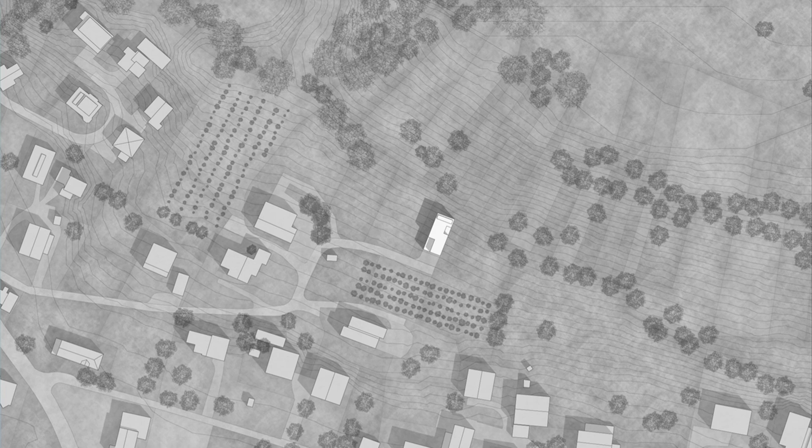Very beautiful thing. We had already done a few buildings in Zurich with rammed earth, and he is an expert in it, and he wanted to set an example with a building built with an old tradition, originally a very economic and very sustainable tradition, to build a new house with modern expression, let's say. The other goal was to use as much excavation material from the site as possible to build the house. In the end, we managed to build the house with 80% excavation material from the site.

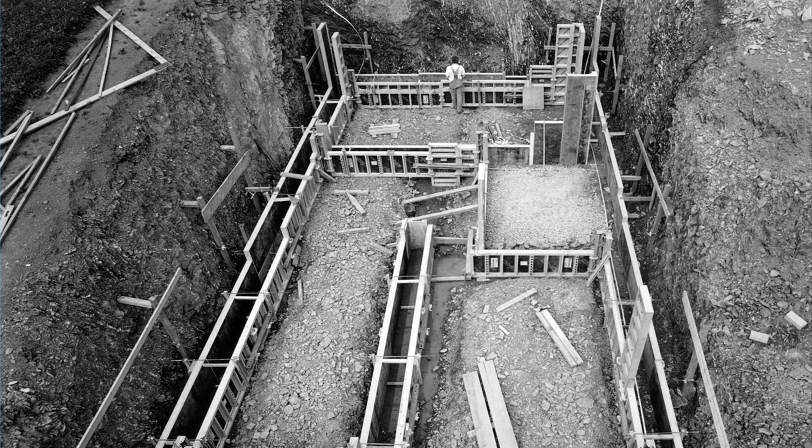Of course, not everything can be done with this material: glass, wooden interior things, doors, and some insulation we couldn't do with it, but we wanted to show the world what can be done with a very sustainable technique nowadays. Everything was built on site. Here you see a slide of the excavation pit with all the formwork. It needs to be very strong. It's similar to concrete formwork.

I don't go into details here at this point. Why am I telling you all this? Because especially in this small house we did there, it's a really smart way to take a shortcut in the circle of how the industry at the moment is working, because excavation material is usually considered as waste. So you dig out the hole, take the waste, bring it away, throw it away, basically, and then you bring new material to the site to build up the house.

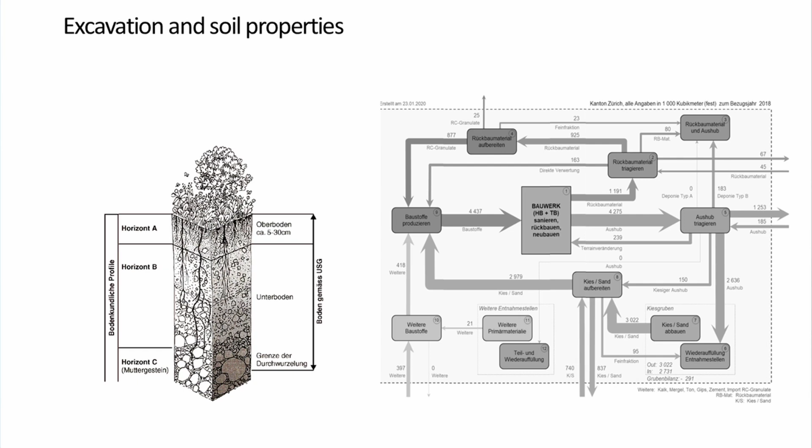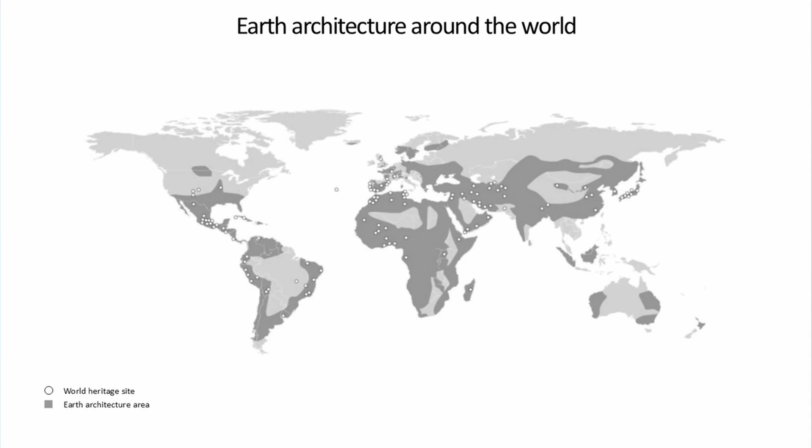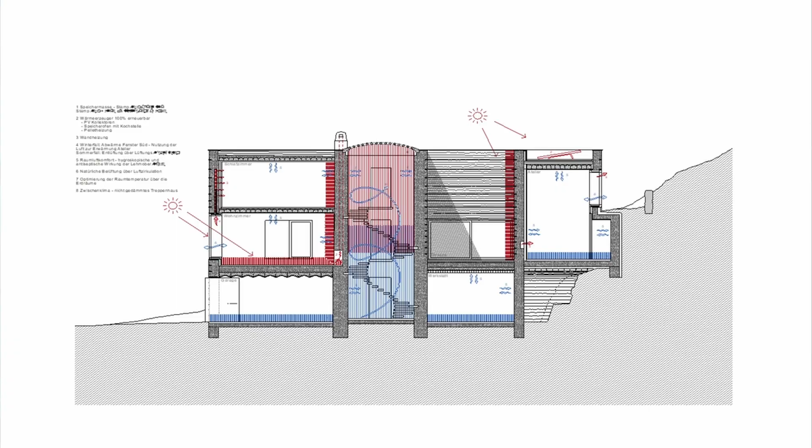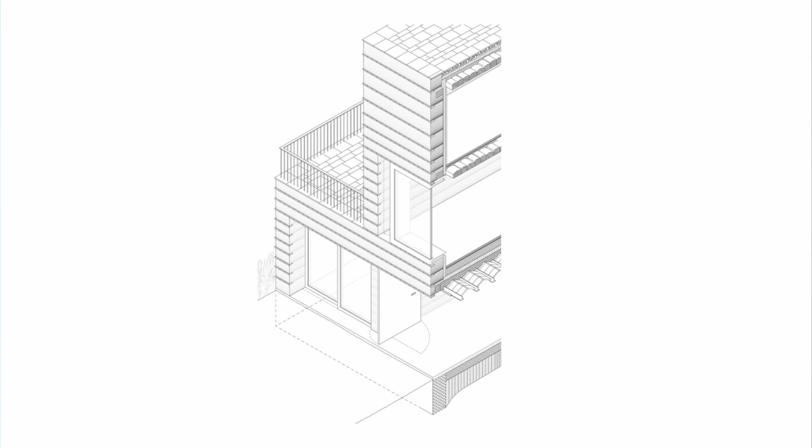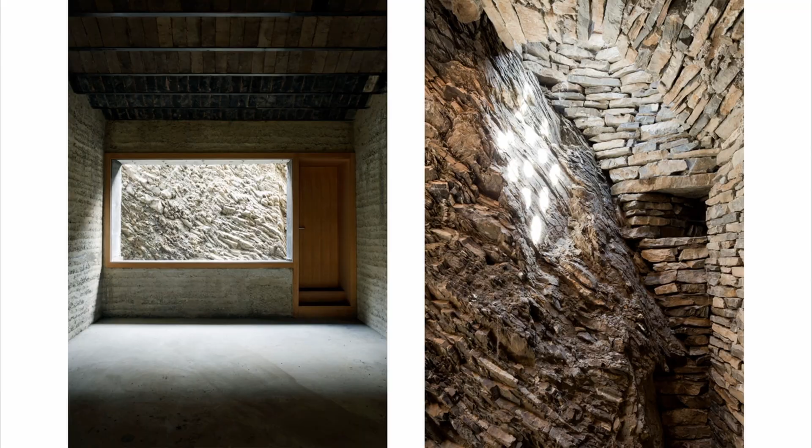Everything is insulated with, what's that called? Reed, also a biological material, except the staircase. There we were keen to see how the staircase and the climate in the staircase reacts, because these walls had to be much thicker. Then all the surfaces in the interior are done by this excavation material we found on site. The floors, the walls, everything. And here another example of it.

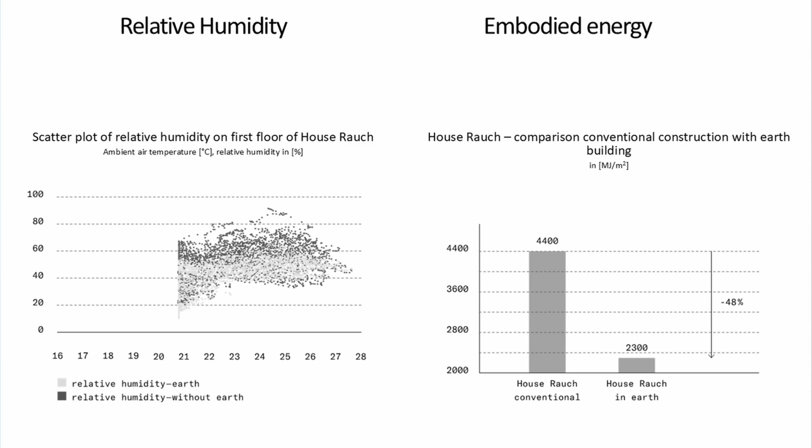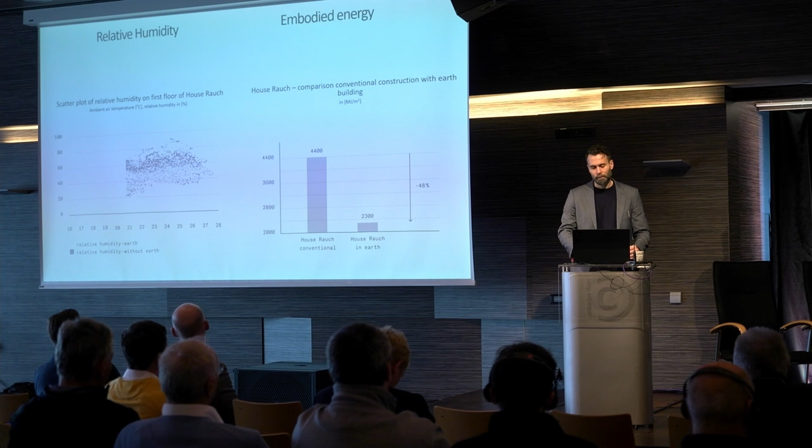They're pretty stable in between 40 and 60%, which people in houses feel as comfortable, whereas a conventionally built house has a much more diverse spread. And on the right diagram, you see the diagram of the embodied energy. These are always calculations, but now we're pretty certain of how the feeling is in this house, because it's so old already. But we calculated that you have a difference of almost 50% in embodied energy to a normal built house.

From there on, I would like to take you to some things we do at the university, especially Boltshauser. He has been to different universities, mainly in Switzerland.

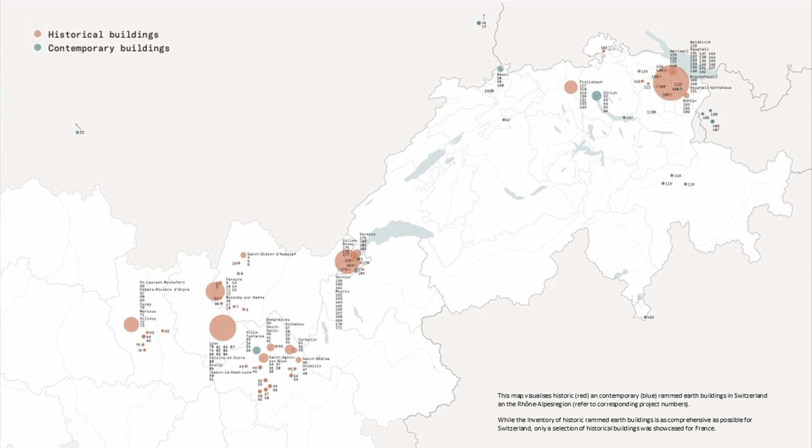For example, in Lausanne, the French part of Switzerland, but also in Zurich, and there we kind of followed the track on the rammed earth examples there are in Europe, because also in Europe it was a traditional way to construct, like before steel concrete got invented, like 160 years ago. It was quite a common tradition, especially in France, in the south and east part of France, around Lyon, but also in Switzerland.

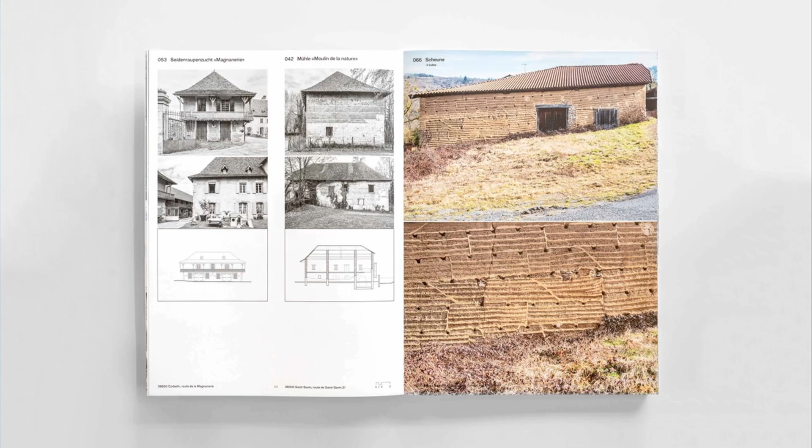We discovered all these buildings, we made a book out of it, we combined it with the modern buildings and showed some details in the book. We even put all the buildings on a map so that people can look at them. We showed, like I said, different examples.

And we also went into Cointeraux, that's an architect out of the 18th century that experimented, or kind of, he did a book at that time about rammed earth building. And it's really interesting to see, I'm just showing you that because the formwork he used was pre-concrete invention, and it's pretty much exactly the same when you look at the plans.

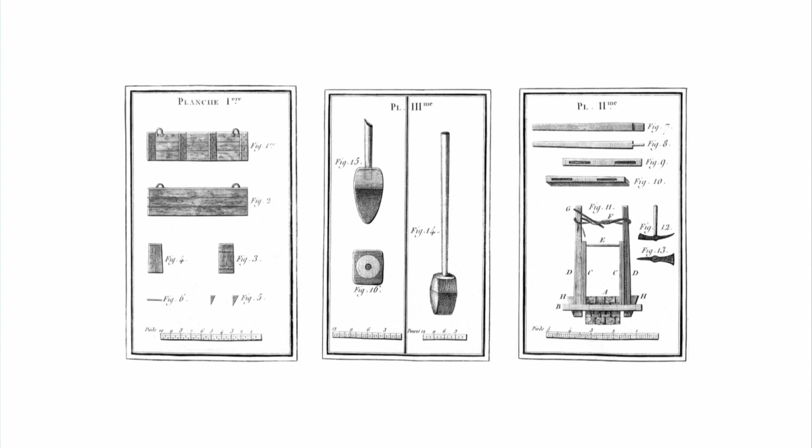With the students together, we did the one-to-one mock-up where we built up rammed earth with this old technique, and you even see you got this climbing formwork here already invented at that time. So in a way it's quite similar, but also it's not.

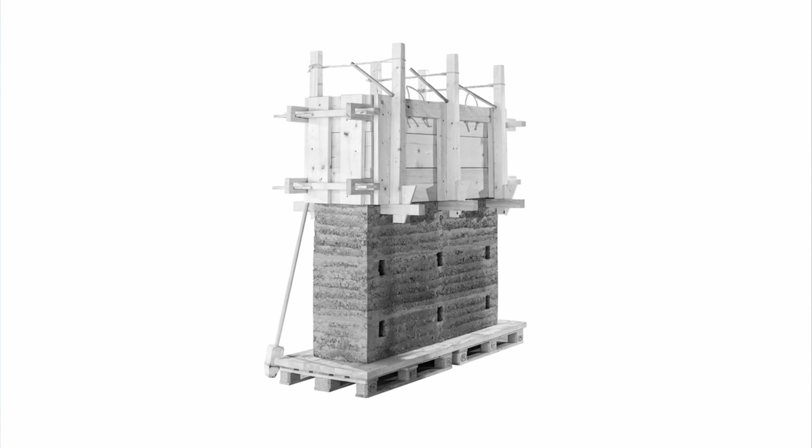So we went following him up, this Cointeraux and all these old buildings, and we, of course, got to the solution that it's not. It might be a good solution for single-family houses, like we did for Martin Rauch, but it's not really possible to integrate it very well in the building industry we have nowadays.

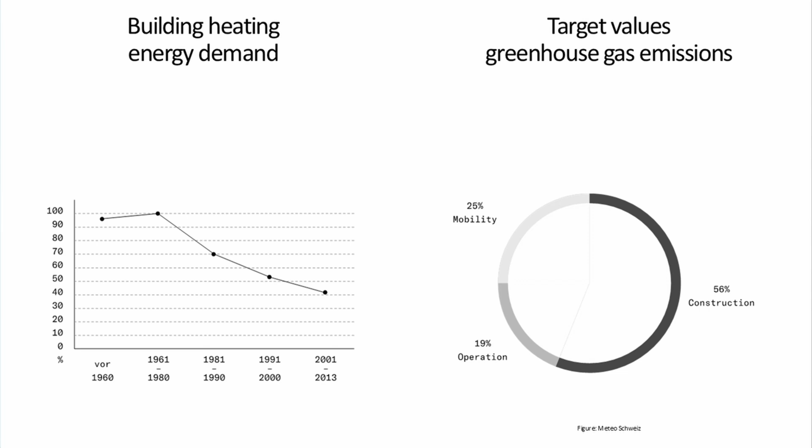Just these diagrams I can skip. On the left side is how the building energy decreased, at least in Switzerland, by new technologies, better insulation, and so on. I think you heard that a lot in different lectures as well. And on the right side, it's the circle of how many greenhouse gas emissions the building industry produces, and just to show you the impact we can make in the future. But this you already know.

So back to the traditional way of building. Then we went to the universities and tried to evolve the learnings we got out of this traditional way of building. And one of the results for us for the future might be, of course, hybrid structures, to combine all these good parts of the rammed earth with other materials and structures, and take the best of both.

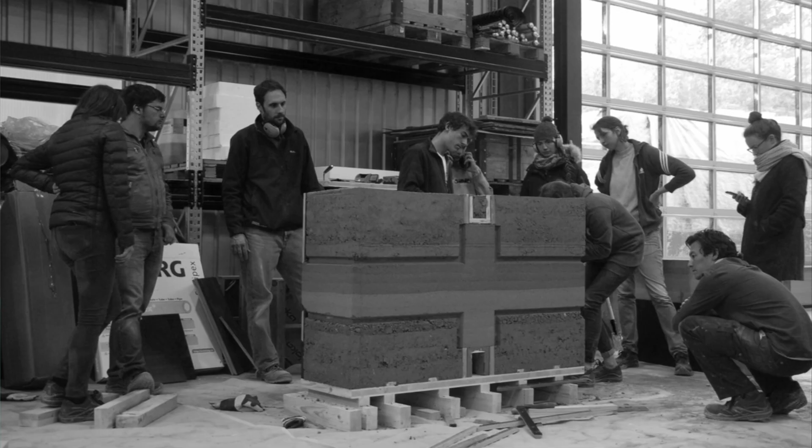So this was an example for the students to motivate them. This is a combination with steel, combination with wood, combination with concrete. And we did these mock-ups together with the students. We let them invent building concepts that work, and let them build these mock-ups in one-to-one scale. It's really nice for the students because they can do something with their hands. They can work on something.

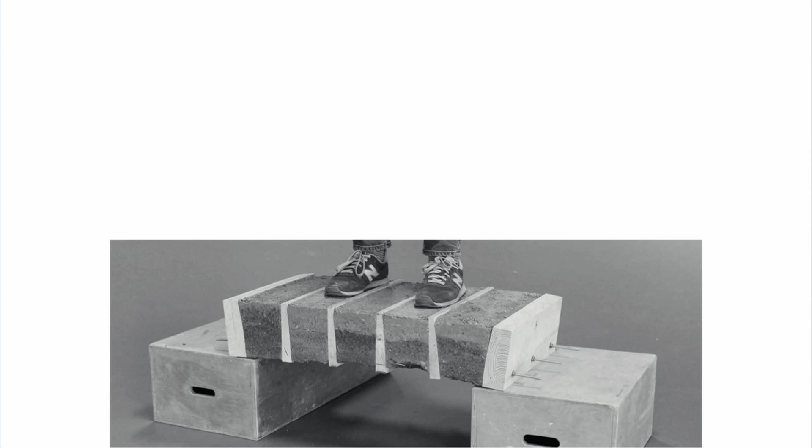Here's a hybrid with wood. One student even did a slab. He found an idea, of course always with our help and with the help of engineers we have at the studios, to do a pre-tension slab with these wooden blocks between, and he even proved with his own weight that it's stable. And then we went on with the students.

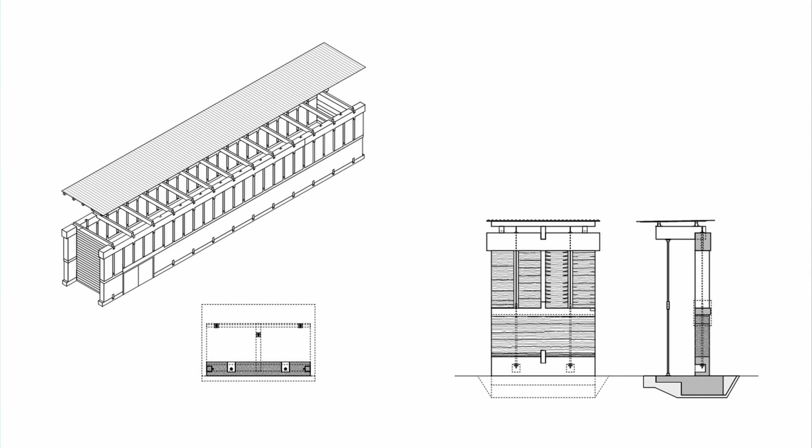This happened in Lausanne. We went on with the students to do an actual project, a pavilion for an art fabric we have in Switzerland. They needed a pavilion for some sculptures they wanted to show. So we actually wanted to do that with the students. At the end, unfortunately, they didn't have enough money, so we could just do a one-to-one scale mock-up. So we organized summer schools, and the students could participate in this.

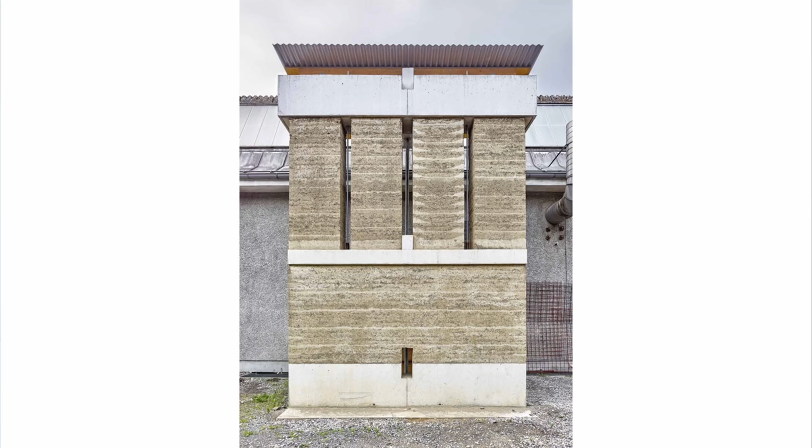And we ended up with this mock-up, and that's actually kind of our first proof of a hybrid structure together with rammed earth. This wall is almost 7 meters high, as far as I remember, and it's a combination between concrete and rammed earth.

It's quite simple. You might know it already, or you have to know that rammed earth is very stable on vertical pressure, but not so stable on horizontal forces such as wind forces or earthquake forces. So the way to stabilize it is to put more pressure on the wall to make it more stable. And the way to do it is to pre-tension it. This you probably all know, of course. And this is exactly what we did with this mock-up.

So we were really interested if it worked. Of course, we couldn't simulate an earthquake on this site. But we were really interested in how this pre-tension works, and at what point it stabilizes itself, because you also have to know that when you produce these walls and ram them, the material is humid or moist. It has this moisture, this Feuchtigkeit, from the ground, and then it sticks better together and it dries out.

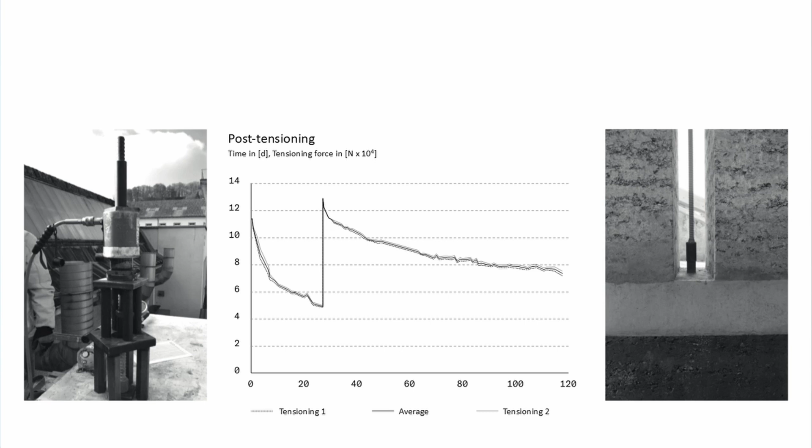And of course, if a material dries out, it loses its volume, and through the pressure it also compresses the whole thing. So it was logical that after a while you need to readjust the cables. So this we had to do twice, at the beginning and after a month, and then it became stable. So it was a proof for us that it works. And then we went into a higher scale.

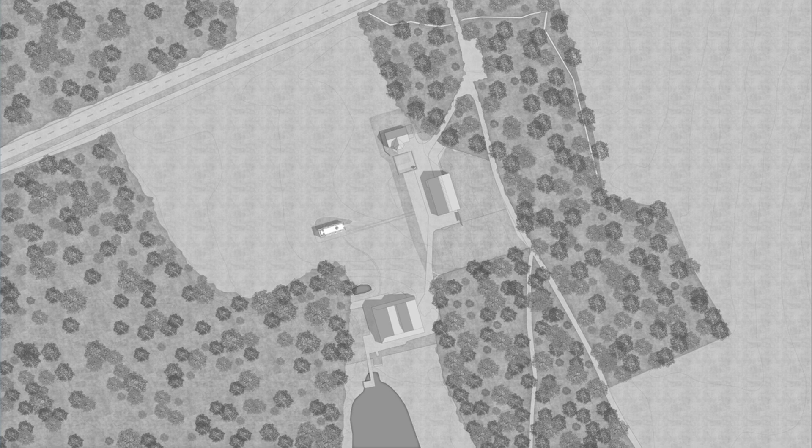As the project we did before with the students was kind of a pavilion, a rather flat building, we then got the invitation of a brickwork museum, also in Switzerland, to do a tower for them. On one hand, they wanted a tower to have a great view over the really nice area they're based in, but they also wanted a kiln, an oven to burn bricks, and they wanted an exhibition room. The kiln they wanted because they couldn't burn the bricks anymore for showing purposes, because the old house they did that in, which is part of the museum, is restricted in terms of fire safety, and this is why they wanted this kiln.

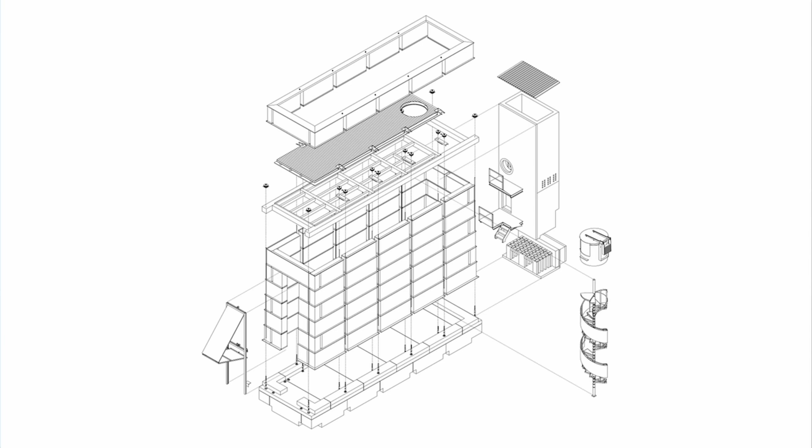And then we invented this project also together with the students and added some new elements that we were interested in. One is the life cycle, of course, of a building, that you can decompose the building at the end of its lifetime. So you can take everything apart at the end. Then we added the theme of prefabrication. Of course, it's a well-known aspect, but in rammed earth construction it's also better if you are able to prefabricate it. You save some time, you're faster. So we did that also in the arrangement of summer schools, so that the students could try it out.

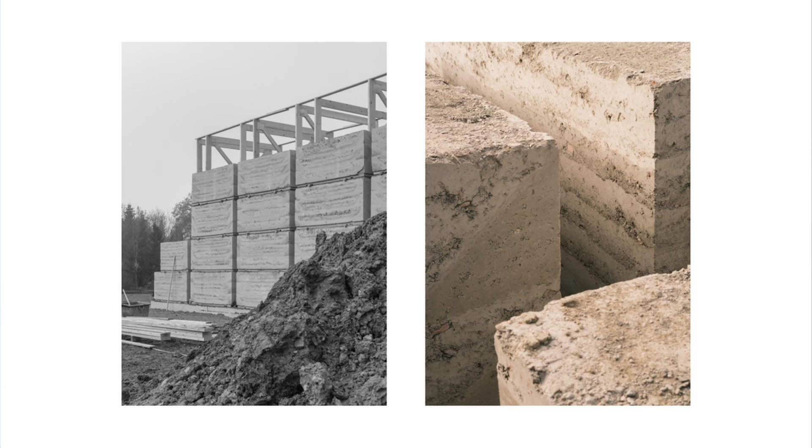And then here you see the mock-ups they prepared in the hall nearby, so we didn't have too far to shift the material from one place to the other. You see some photos of how it gets built together. Here is a section of the building. At the end you have this kiln, the oven where you can burn the bricks for educational purposes, and then you have the showroom on the floor. It's quite a high room, and then the view on the rooftop.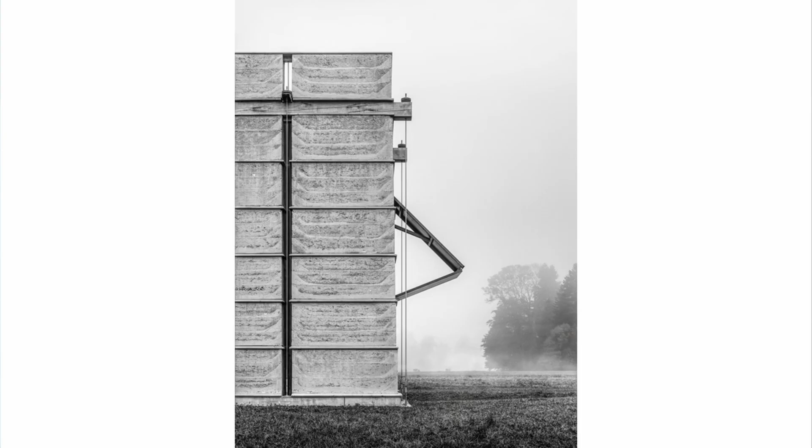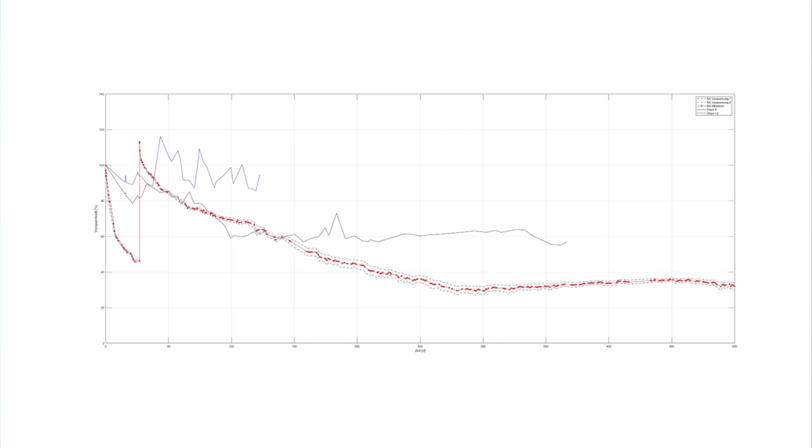This one we couldn't do with the rammed earth system. We had to do it with bricks, and we did it with compressed earth bricks with a little amount of cement in it to make it more stable. It has to be more compressed, so that it can resist the fire and the heat from the oven. This is a picture from the outside. You see the tension cables in a little more detail. And also, of course, like in the project I showed before, we studied how the tension reacts over time.

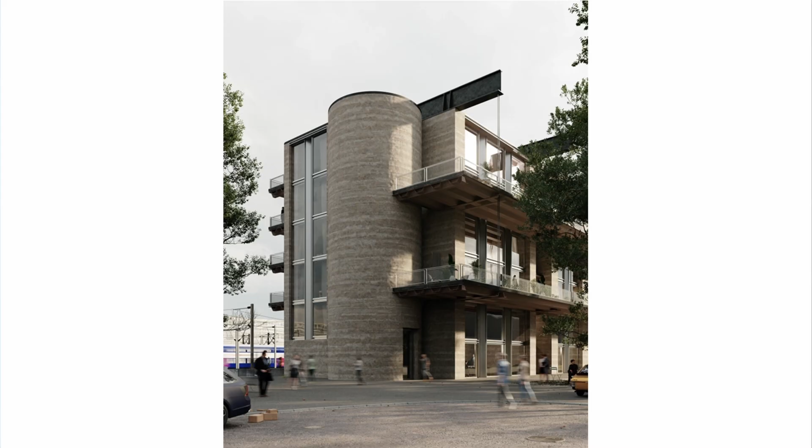Then we went to another project where we combined steel with rammed earth as a hybrid structure. This, unfortunately, didn't get built. It was on a site in Rapperswil, also near Zürich, at the train station, and it was a case study project at the beginning, but with the idea that the national train company might build this house in the end. It didn't happen so far, but we're still hoping for it. Anyway, the purpose of the building was housing and offices.

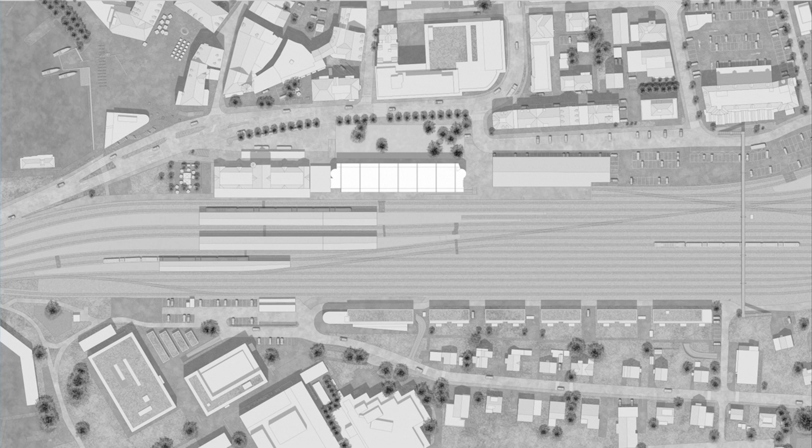Oh. Excuse me. Yeah.

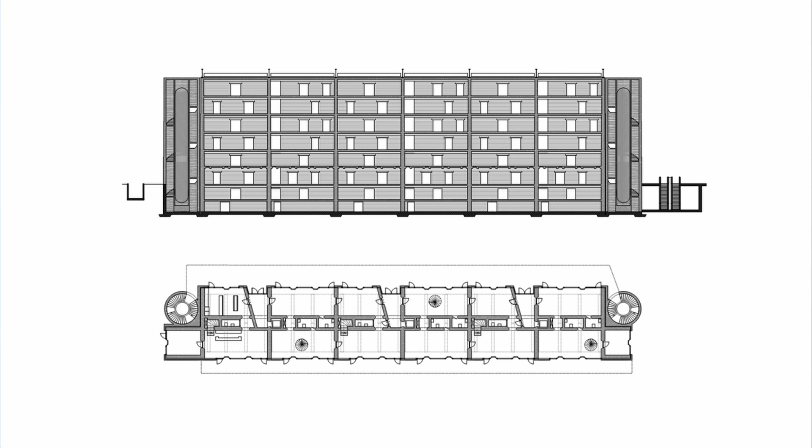Here you see a section and the floor plan. The core of the building and also the dividing walls are made out of these thick rammed earth walls. You have a staircase at both ends of the building, and you can get to the apartments or the offices through balconies. And this is a model we did from the outside, and again you see here the intention we developed a little further in terms of the steel.

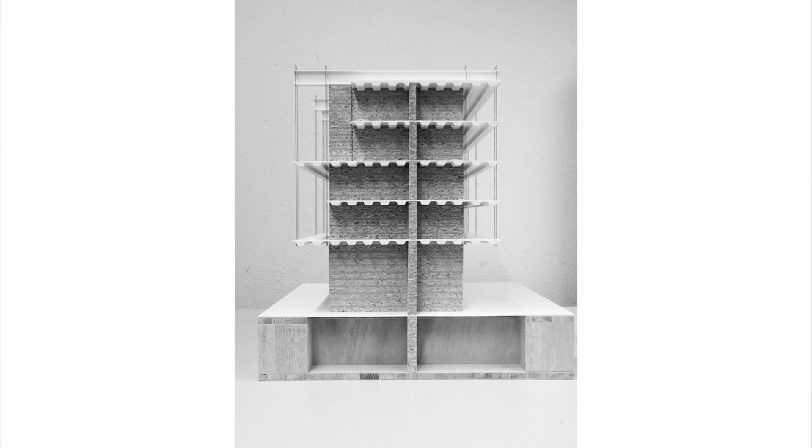Of course, we would try to use recycled steel. That's also a theme very well discussed, to close the circle of the lifetime of the materials. It would be recycled beams on the top, and for the slabs, I always forget this name, I'm not even sure if it's right, but the sheet pile walls, the walls you need to secure the excavation pit when you dig out the building. Maybe you see it a little better here. We would recycle those as well and fill them up with mass, also with rammed earth, to get all the physical aspects the building needs.

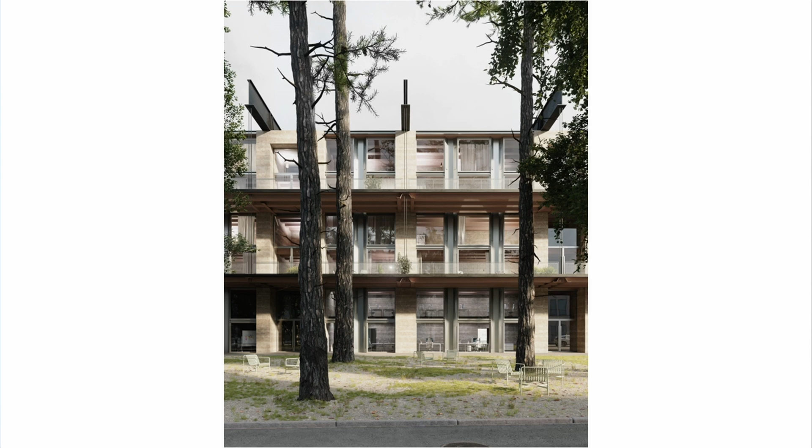Of this, at least, we did a little scaled one-to-one mock-up to see if it's possible, how it functions in the process when you have to ram these sheet piles into a wall. Then, of course, we did studies with pictures, here also so that you get an impression of the building. And then we also got into the technical system of the building.

We were really interested to use the benefit of these thick walls also in the heating system, because we couldn't bring a heating system into the floor, so we had to put it into the walls. But that's actually really nice because the walls are so thick, they can capture the temperature and give it to the room really slowly. It's nice. And then, of course, we work with solar panels on the rooftop to gather some energy.

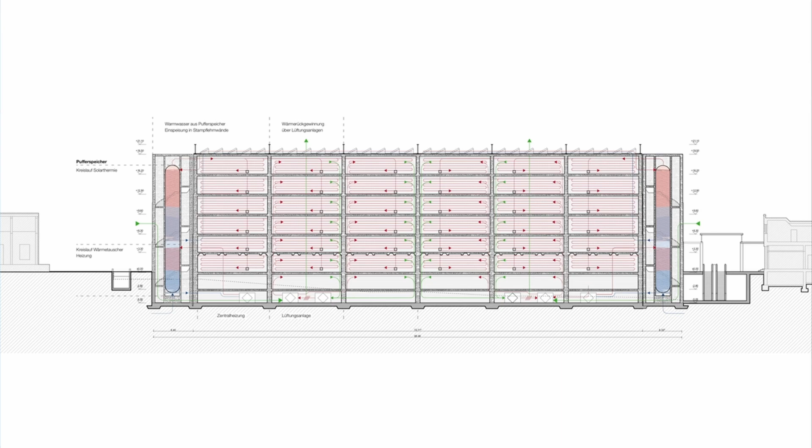And then the idea was to do at the end of the building these two energy stack tanks, to integrate them together with the staircase we needed, to collect energy mainly in summertime and store it in these energy tanks, which we combined with the staircases, and you can use it later when needed.

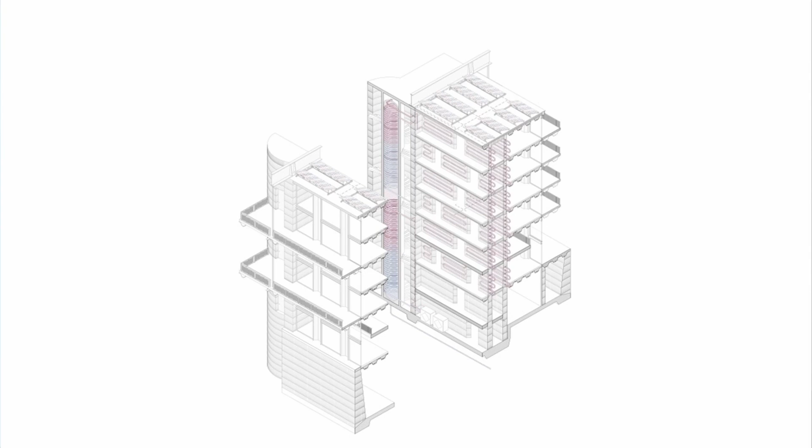And here you have an impression of a ceiling, how it could look. Then another detailed scale of this energy system we were working on, and then an image of a balcony. Yeah.

And then we're at the sports center, where a lot of these themes end up and find their result in an actual bigger scale building. So we started with the Haus Rauch at the beginning, a really small building, more than 20 years ago. And now we end up with the biggest building the city of Zurich is currently planning. We won this project through a competition. In Switzerland, often these kinds of projects are won through competitions. It's actually a really nice thing because it's good for the offices to compete against each other, to raise the standard a little bit.

It's located in the northern part of Zurich. There was already an existing ice skating rink on site, and also a bathing or swimming center. And the city evaluated the situation, because it also could be good to preserve these buildings and add new components. At the end they came to the conclusion that it doesn't work out, if you sum up all the topics from sustainability to costs, and the program, the uses they wanted to fill in. We did it again after we won the project, because we wanted to be sure that it's really a smart thing to build a new house.

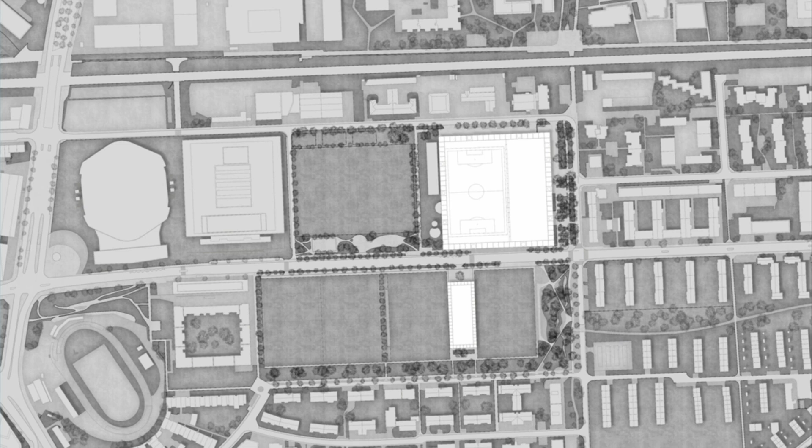On the south side of this lot is this changing room building for the football players. It's only for the football players. They can change there. And then the area also contains 6 football fields on the ground and 1 football field on the roof of the building. That's how the main building looks, the one on the north side.

The city of Zurich was quite keen to make an example, said in German, a light tower project. I don't know how to translate this, but an example in terms of architectural expression, of course. They want to make an example of how smart it is to combine a lot of uses into one building, and they wanted to do an example in terms of sustainability for these kinds of buildings, because at their core these buildings are a huge waste of energy.

You'll see it later on, and one can discuss if it makes sense to do this or not, but yeah, we probably wouldn't get to an end. Anyway, also in the architectural expression, we want to be bold and make a statement. The whole building has the first 2 floors, the ground floor and the first floor, completely open with glass. You can walk around the building, you can look in and look out in every direction.

That was quite important for us because the dimensions of the building are 120 meters. It's quite wide. It's a problem for daylight, so we open up the first 2 floors, and most of the uses that need daylight are based there. And then you have this ring of this trass lime material. It's comparable to the earth material we used before. It's a horizontal element.

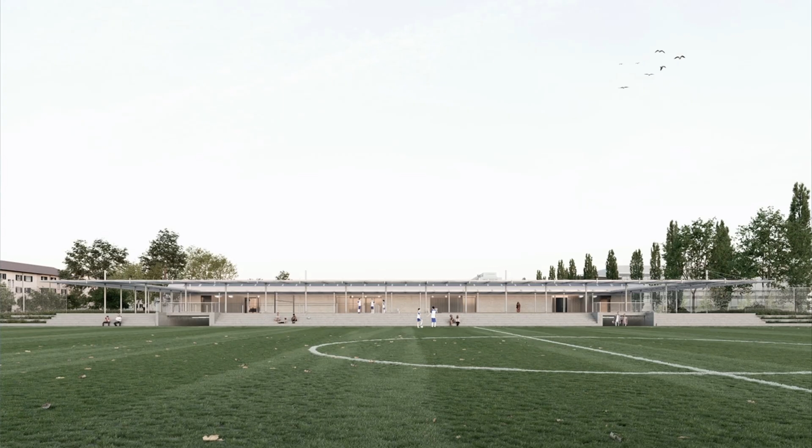And then, quite iconic, we think, are the 10 towers surrounding the building, which hold this roof of photovoltaic modules, but also have inside, again, this energy stack, cylinders filled with water, and the fire escape stairs around them. This is the football building. I'm not going to talk about that too much. Of course, it also has a lot of PV around, and that's the floor plan of the building.

Here. You enter from the south, and then have quite a good view over the whole building and over the most important uses in it. For example, you can see here right through the whole building to the end, a 100-meter-long distance. If you stand here, you can also look through the building. That was quite important, as I said before.

Then we have a diving tower pool up here. It has to be built for international contests. Then a 50-meter pool, also for international contests and competitions. Then we have here a fun area where you have a warm pool, water slides, pools for children, and these educational pools where schools can learn to swim, but clubs and other sports organizations can use them too. For example, water rugby, I didn't know that it existed, but it does.

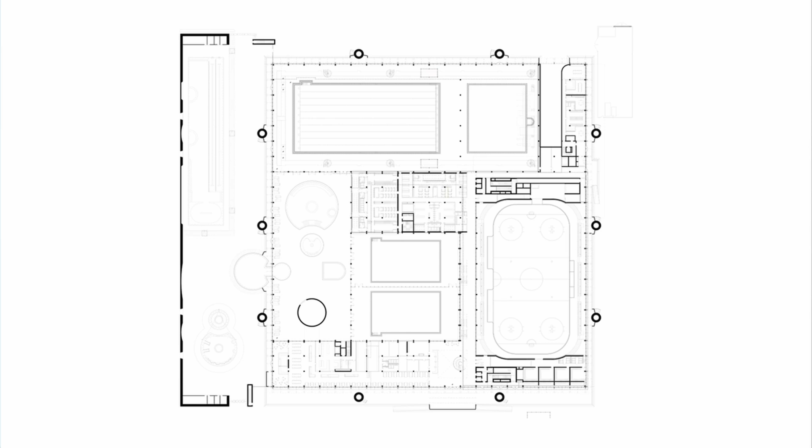So a lot of things in there, and also a lot of different climates. We have summer and winter in the building, and summer and winter outside, and all these issues with water we have to deal with, of course, and all these aggregate states, in water, in ice, and in air. I tried to keep it a little short.

I'm going to show you three essences of the building. One is for sure the primary structure of the building. We're trying to do as much as possible in wood, also in terms of sustainability, but we didn't do it just because wood is kind of the only solution. And of course, we have concrete in the building. We need concrete. It makes a lot of sense to use the concrete for certain purposes. But we tried also here to find a hybrid system to take the best of each material.

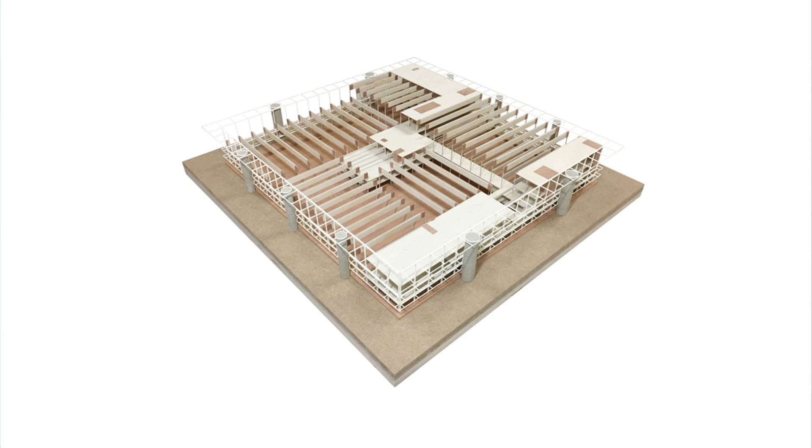And the thing I would like to show you a little bit are the beams we invented. We want to do them out of wood, of glued laminated timber, and pre-tension them and bring them on site, either prefabricated or partly fabricated on site. We're in the middle of the process. We don't know yet how we're going to do that and how much it costs. Because these beams, the shortest ones are 20 meters long and the longest ones are 40 meters long. And that's quite a special way to do that with wood and also pre-tensioned.

So to be sure, we did, together with the city or for the city, and together with universities and testing centers, studies and compared it to steel beams, to concrete beams, to wooden beams, and we did a matrix. We sorted out which one is the best result, and we're certain that in terms of civil engineering, this works. We did some tests. We did one-to-one tests in laboratories to see.

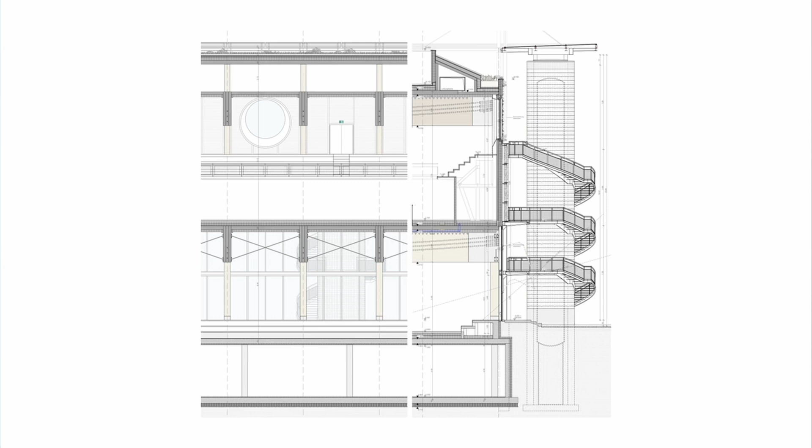I don't know, something is wrong with the two pictures on the left, but the right one, you see it a little bit better. We did the test to be sure, and we also evaluated in terms of sustainability which is the best one. We looked at the cost and everything, and now we want to do it. And it's not well known in building to do this kind of beams.

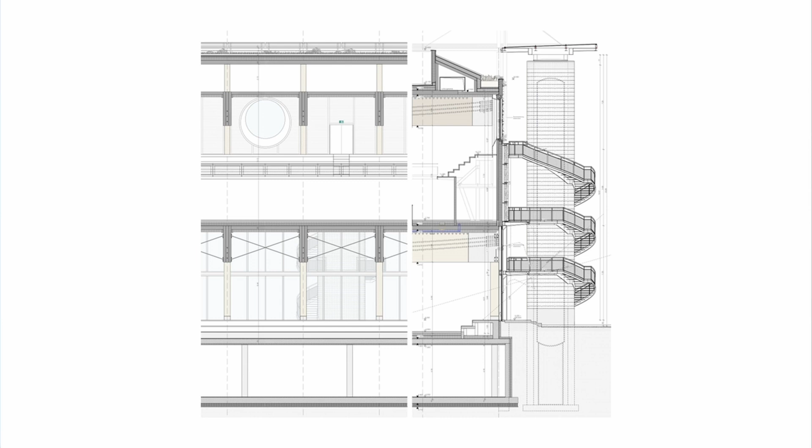Here you see the section. On the left side of the section, you see the stacked ice hockey rinks. That's a really big challenge because they have basically zero tolerances on the ice field. It's really critical, obviously, that you have good ice. It's a 1 to 2,000 tolerance we have to fulfill there, because the hockey players know if on one side the ice is 2 centimeters thicker than on the other side, because the puck gets lower, and that is a disadvantage during playing. So this is going to be a real big challenge for the beams over the ground floor. The other beams, we're quite certain they will work.

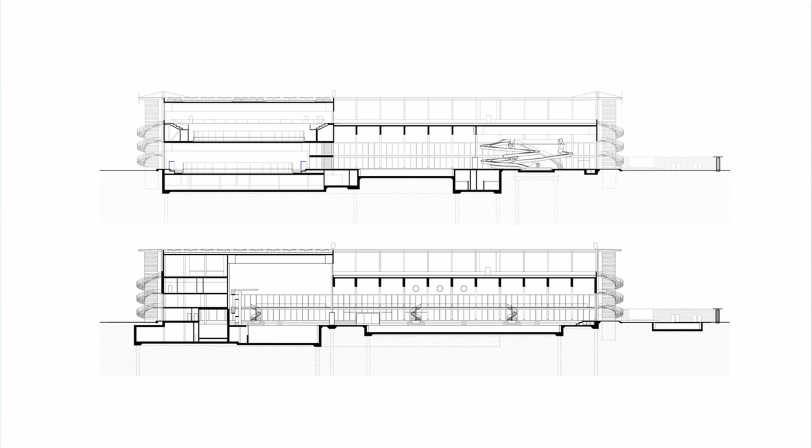And then I jump to the next theme, and that's the one I was leading up to through the previous projects I showed you before. We also wanted to bring this architectural language into this building and prove to ourselves and the world that it's possible to take this idea we invented or reinvented or reused in this earth building at the beginning to the bigger scale. You see here the towers are in this material. I have to say here it's now trass lime, but we started with this rammed earth material.

And you have this horizontal architectural element. We want to do it in this material. We think it's really important, architecturally speaking, to have this balance between the massive elements, these iconic towers, corresponding to the more lightweight steel architecture with the photovoltaic roof, or the first two floors that are covered with windows.

So for the material, we went on a search. I don't know how well you can see it. We went on a search with three different mixtures of materials. It started with a mixture purely out of rammed earth. And we did tests in laboratories in terms of all the civil engineering challenges it has to fulfill, and it's a big scale. You probably know it better than I do.

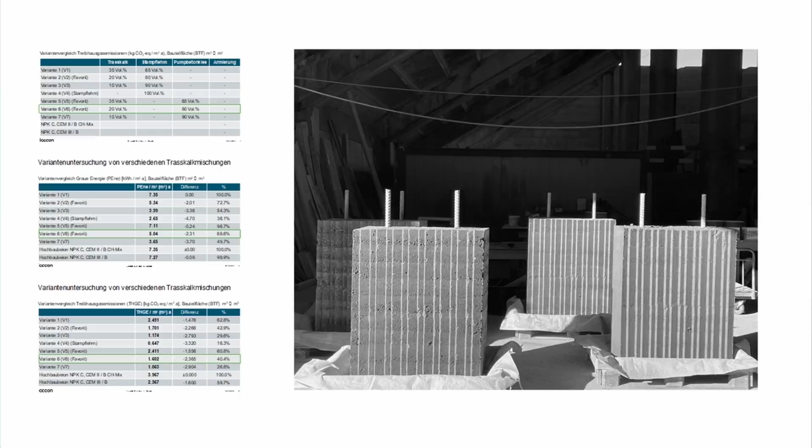So the material that won in the end for the towers was the mixture of trass lime and gravel, and the one for the facade surrounding the building, this closed part of the facade, is the mixture between earth and trass lime, because it doesn't have to endure so much force. The towers, as you see, are quite high. They're over 20 meters, and at that scale we have to be sure that it works. That's why we decided on the other material that's more resistant. At the moment, we still have to pre-tension the whole tower. That's also not going to be that easy to construct on site.

This tower leads me to the last topic I want to show you, and that's the technical building engineering inside, the heating system and all of that. That's also a really big issue to stay sustainable. I said at the beginning that it's actually a little stupid to do these uses nowadays, because they eat up a huge amount of energy. But if you combine the two activities, ice making and water heating, you get a quite nice loop. So one can profit from the other, kind of our perpetuum mobile. The loop is the idea, the heart of it all.

While we're making ice, a lot of heat gets lost and can be used to heat the pool. And our idea was to not lose any energy out of the building and reuse all the energy. The surplus energy from producing ice we store in these energy stack towers. You see that in the drawing in the tower, this capsule kind of thing. This is filled with water. The water is not directly filled into the lime trass tower, but into a steel tank. You can stack the energy at different energy levels and re-implement it into the building when you want to use it.

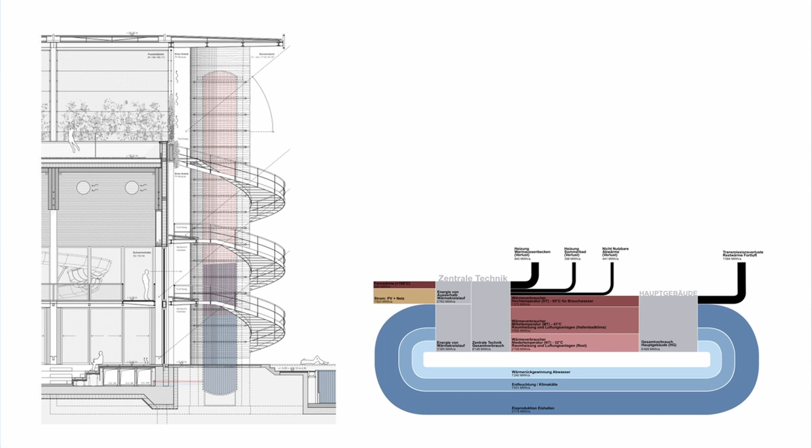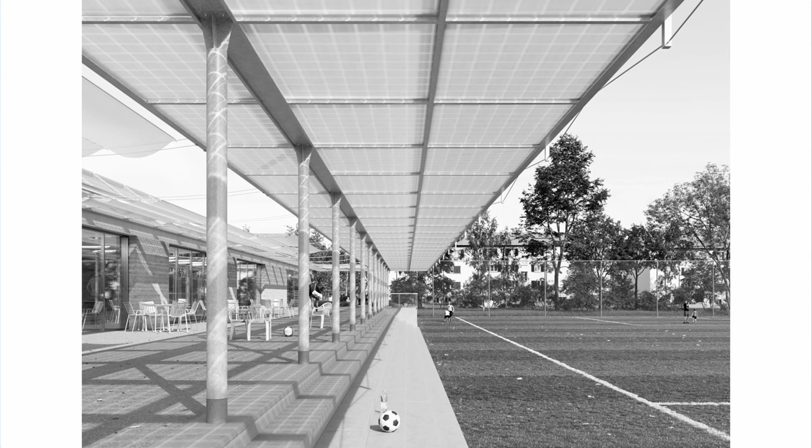And the whole thing is driven by electricity, of course. Part of the electricity we try to produce ourselves. This is why we built these huge PV roofs, and the latest calculations are that we are able to produce at least 40% of the electricity we need for this building. For example, here at the football players' wardrobe building, we also use these roofs, and need them to give shade to the people who watch the football games.